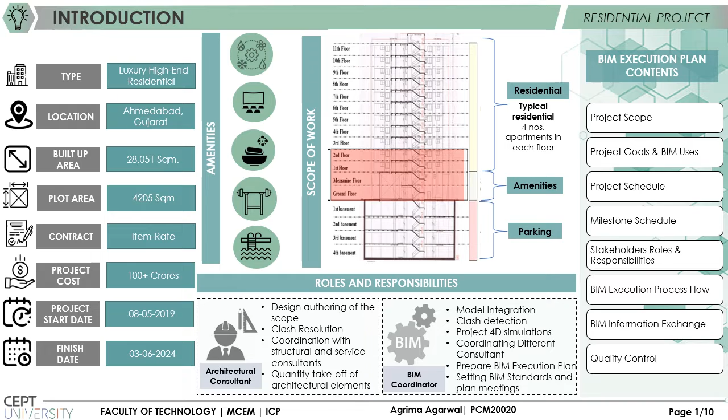Revit helped to create a parametric model right from the beginning and all the architectural elements were modeled. The elements were walls, doors, staircase, finishing and glazing. Railing was also there as per the 2D plan drawings and specifications provided. The scope was LOD 300 and LOD 400 of the ground floor, mezzanine floor, first and second floor. The architectural model is prepared with much accuracy as it is one of the primary models, or the master template, for all the other discipline models.

The constraint faced was that the architecture and structure models were getting modeled parallelly, so we used the BIM 360 platform, which integrates models together and allows clashes to be revised quickly in certain areas of the model visible to the naked eye, so as to avoid unnecessary modeling errors and clashing. The major learning of 3D is modeling as per constructability and identifying clashes before the execution starts.

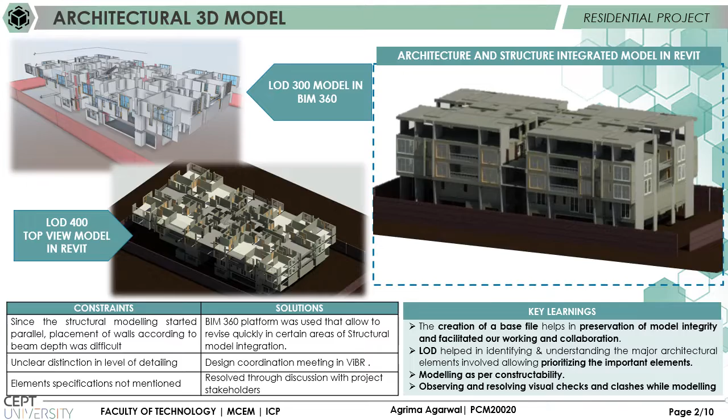There are three types of quality checks that were prepared in our BIM XP plan, and we have incorporated them in our project: visual, standard, and interference checks. Visual checks are made to check model element variations, which can be seen easily in the model through the naked eye. The checklist is prepared to scan those specific parts of the model so that errors and mistakes can be resolved for the receiving stakeholders.

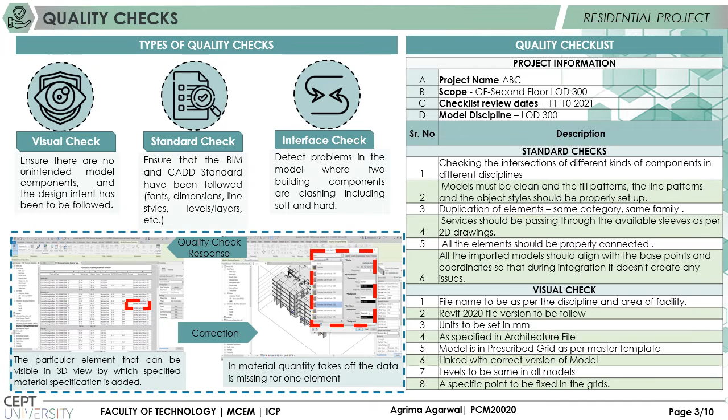Interference check. Interference check is done to identify clashes and intersections between two model categories. It is done because in the traditional approach with 2D drawings, it is difficult to coordinate the different stakeholders, as they work in their own silos, due to which many clashes are observed during the execution phase of the project. That is why interference check is done, to help identify those clashes and resolve them before site execution takes place.

For this, we used Solibri Model Checker and the BIM 360 platform. In Solibri we found clashes and did quantity takeoff, and its main advantage is that it has an inbuilt checklist for which we can change rules and parameters and apply them in our model checks. Whereas in BIM 360 we did visual checks of integrated models, and a responsible person was assigned each particular clash. Any changes done to the model by the respective consultant will be reflected to other consultants who are using the models for reference. The QC process helps to eliminate clashes so that other consultants using the model don't end up doing repeated work.

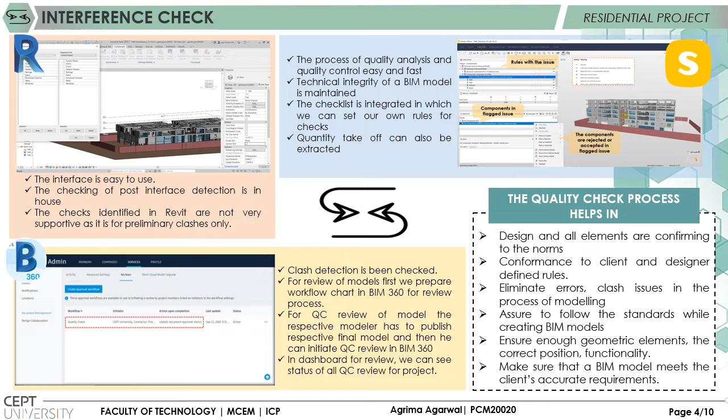The main purpose of the quality checks is to eliminate errors and clash issues in the process of modeling, and to make sure that the BIM model meets the client's accurate requirements.

The third software for interference check used was Navisworks, in which different discipline models are appended, and the clash run is done with a set tolerance level, majorly for hard clashes, with n number of iterations until there are zero clashes. The generated report shows the element ID, by which it can be identified in Revit to be resolved by the assigned responsible consultant.

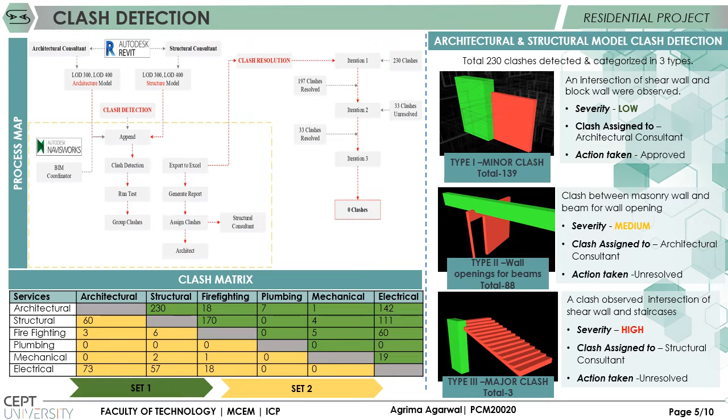The clash matrix here shows the two set results of the interdisciplinary model. In the first set there were higher clashes, and then they were reduced in set 2. The process of clash resolution and discussion was carried out during scheduled virtual big room meetings with other stakeholders. Here, architecture versus structure clash detection is shown as an example, in which the clashes are identified and categorized as relevant and irrelevant, and based on severity as low, medium, and high, which are then assigned to the respective consultants and resolved by them.

The major relevant clash was identified in architecture versus firefighting, in which a fire hose pipe was going through the staircase landing slab. This was noticed during on-site observation, and the reason this type of clash occurs is that in the architectural structure modeling there was no cutout given in that area, while the cutout is there in the firefighting drawing. This shows the lack of collaboration between all the stakeholders and the quality checks done.

This clash had higher severity, so we did quantification of this and found out the total rework cost would be 9,630, including the core cutting cost, material wastage cost, and the labor cost. This amount is an irrelevant cost incurred. So if such clashes can be avoided in any construction project, it can provide the project team with cost saving with respect to the overall project cost.

If such clashes are identified before the start of the project, it can reduce rework effort in terms of time and cost. We found out that coordination and communication are very much needed. The key learnings are that adoption of a clash detection and resolution process helps in elimination of iterations and field conflicts which may arise during the execution phase.

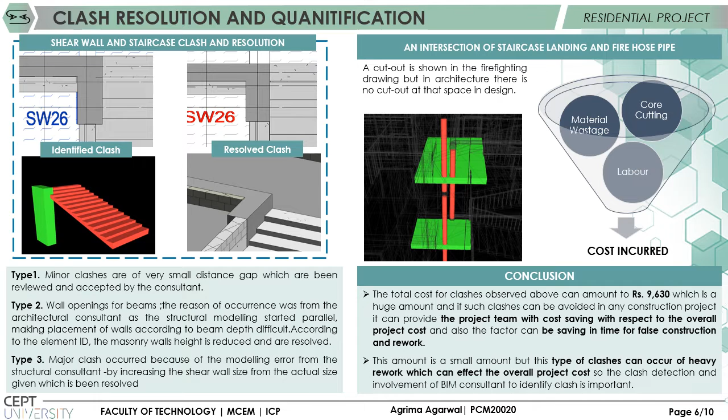The 5S Lean tool was implemented for document management among us on OneDrive by sorting the unusable and duplicate documents, setting in order the logical folders and subfolders with specific keywords for easy identification, and implementing a periodic self-check and self-audit of all the documents and settings. The implementation of standard document management, which includes document naming, usage, and archiving documents, was all done with the help of the 5S Lean tool.

4P: the basic Lean principles of people, product, process, and performance. For example, people's roles were collaboration and continuous learning, processes were waste identification and reduction using the LPS tool, and performance is evaluated on the basis of quality, time, and cost.

PDCA, Plan, Do, Check, Act, for continuous improvement, starting from the main objective as BIM-XP to execution of 4D, the Last Planner System, the engagement of stakeholders, their engagement in the Choosing by Advantages exercise, and lastly to determine the effectiveness of the IPD approach.

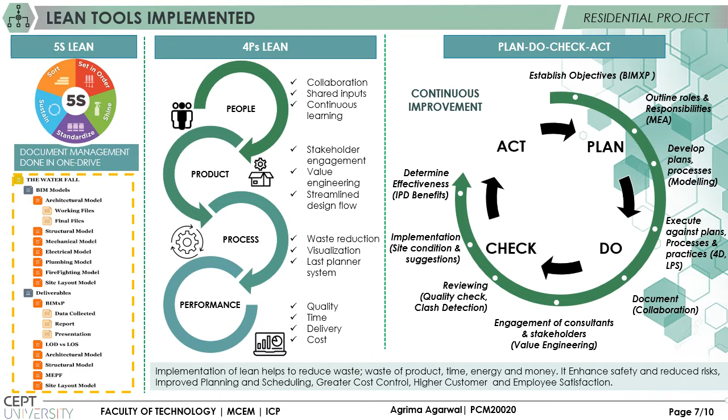Various other tools were also used throughout the semester, which help to reduce waste of product, time, energy and money. It enhances safety and reduces risk. It also improves planning and scheduling. It gives greater cost control and higher customer and employee satisfaction. These can be done by daily huddle meetings of all stakeholders in processes.

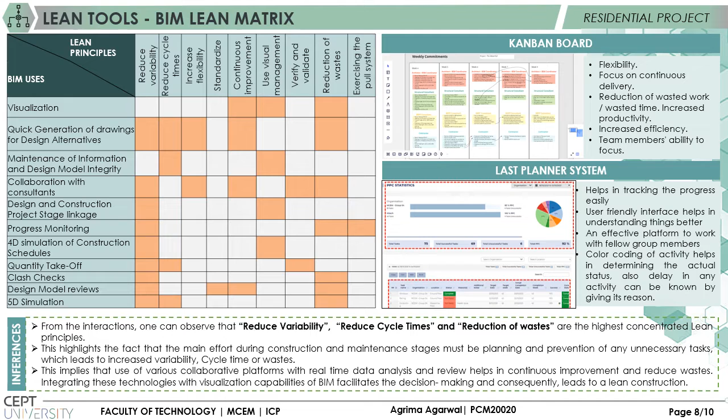The plans of each consultant were maintained on a Kanban board. The minutes of meeting were prepared for all the meetups, either internally among consultants or with on-site engineers. This helps to identify delays and mitigate them. The Last Planner System helps to track progress and schedule. We used VisiLean software for the Last Planner System.

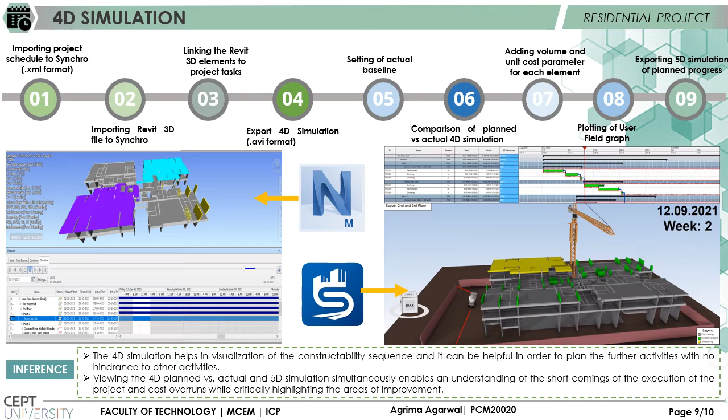4D simulation was done in Navisworks and Synchro 4D Pro for planned schedule simulation and planned versus actual schedule. The 4D simulation helps in visualization of the constructability sequence and can be helpful to plan further activities with no hindrance to other activities. Viewing the 4D plan versus actual and 5D simulation simultaneously enables an understanding of the shortcomings of the execution of the project and the cost overruns while critically highlighting the areas of improvement.

Traditional versus IPD approach in construction is very important for this studio. There are various factors that are not incorporated in traditional methods, like value engineering and the Last Planner System, and there are tools that are incorporated. Clash detection can't be done in 2D drawings, so Navisworks can be used for better visualization, and clash detection can also be executed at an early stage.

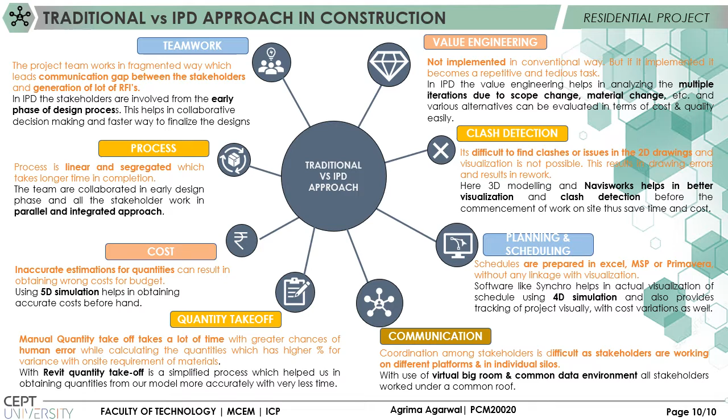Methods like quantity takeoff in Revit take less time and reduce cycle time compared to manual takeoff, where human error is there and variances are observed. Planning and schedules are prepared in Excel, MSP, or Primavera software without any linkage with visualization. Software like Synchro helps in actual visualization of the schedule using 4D simulation and also provides visual tracking of the project with cost variation as well.

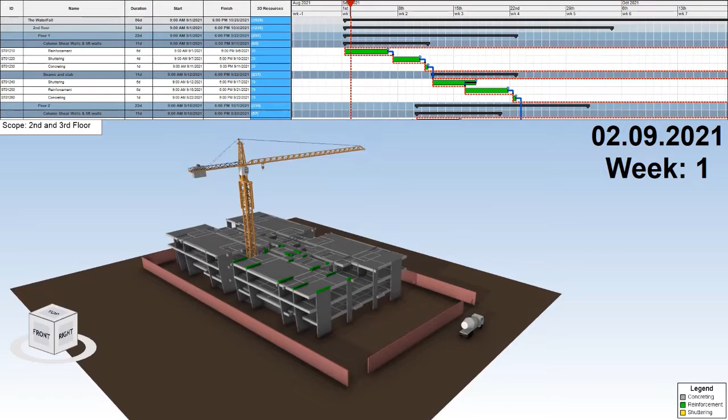So this is a 4D simulation of the planned schedule that we have prepared. The appearance profiles have been given for concreting, shuttering, and reinforcement, which can be seen in different colors. There were four cores in our project. With truck movement, we can see how many resources will be deployed, by which micro planning and space planning can be done in advance. Tower crane boom movement is shown, by which we can visualize whether the vertical elements are obstructing or not and how much they are obstructing.

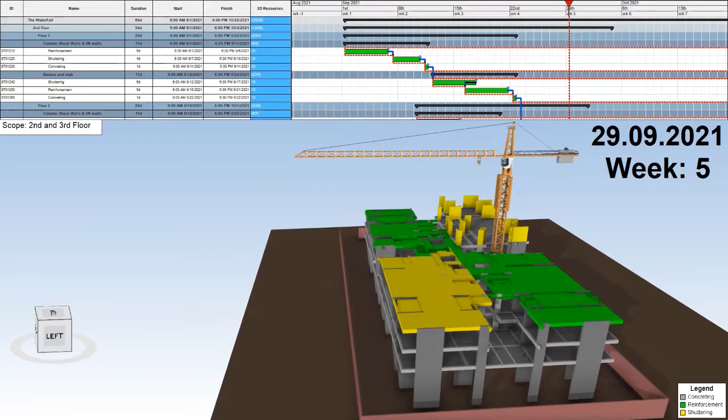So we have taken two floors, the second floor and third floor, for our study. The schedule was prepared in MSP software. We also used Primavera software for this. So we have done this visualization and we have prepared the reinforcement in one of the cores of our project. This video was prepared in Synchro 4D software.